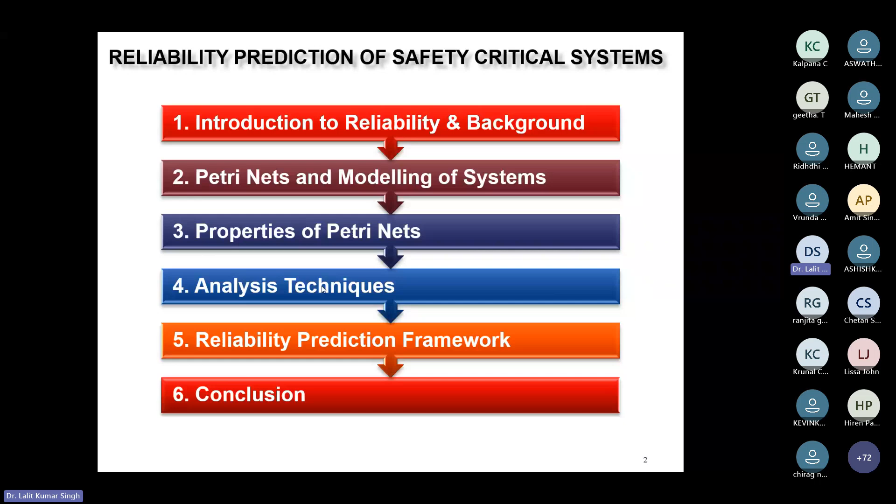Now let us see the mathematical definition. Suppose let X be the random variable representing the time to failure of a component—this much time that my component is going to take to fail. Then the reliability of the component at time t is given by P, which is a probability. Because I'm talking about reliability, it means X, which represents the time to failure, will always be greater than the target time. It should not fail before the target time. Then I can say this is reliable. So this equation is very clear.

From the total probability law, we can equate it as equal to 1 minus P(x is less than or equal to t), meaning it has failed before the target time. So it is nothing but a failure probability, which we can write as equal to 1 minus failure probability, denoted as F(x,t).

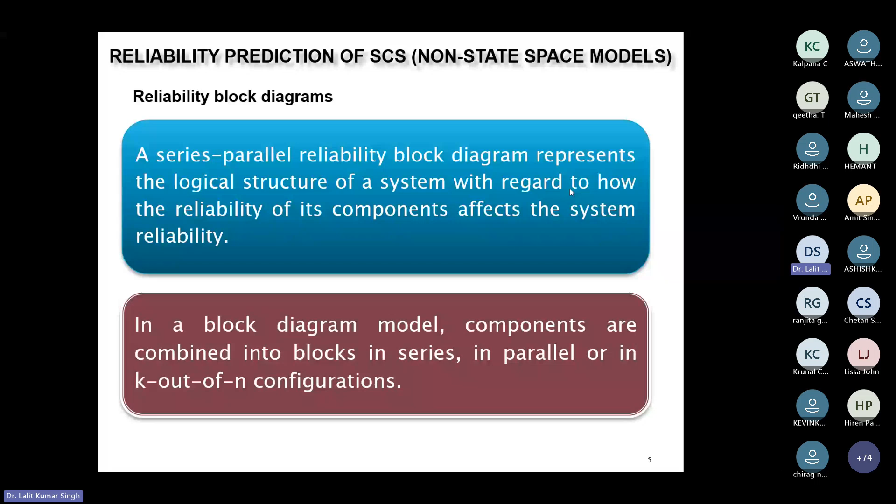Now let us discuss some traditional methods through which we can quantify reliability. The first is the reliability block diagram. In this, any system is decomposed into subsystems or components, and we find out how those components are arranged, whether in series or in parallel. If I know the component reliability, I can find the overall system reliability using series or parallel reliability formulas. For example, if a system contains only two components with reliability R1 and R2 arranged in series, the overall system reliability will be R1 into R2. If arranged in parallel, I can use the parallel reliability formula.

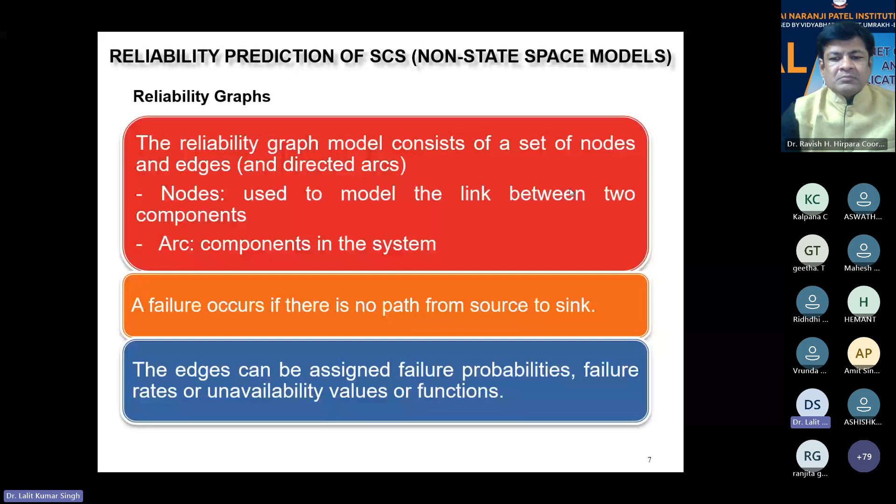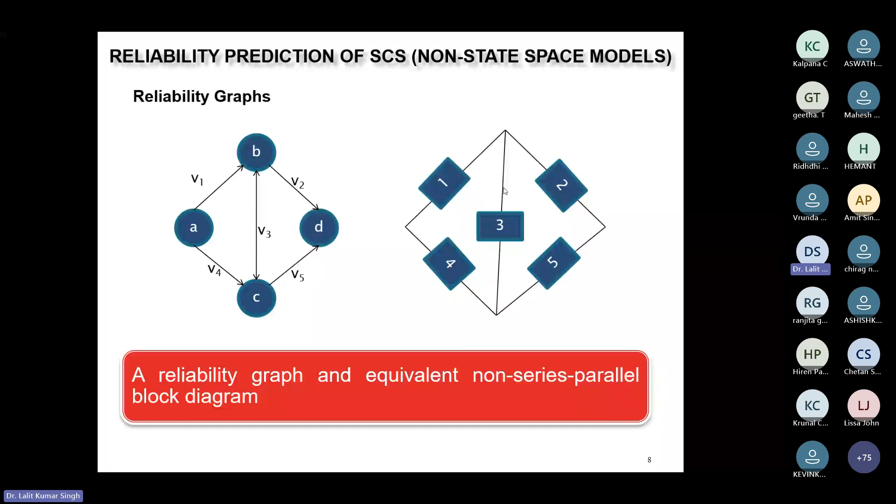There is one more very prominent method for reliability prediction or estimation, known as fault tree. Fault tree is basically a deductive approach. We know a tree has a root and branches, so it is like root and branches. The top level component is known as the root. In this approach, we try to deduce the cause of the failure.

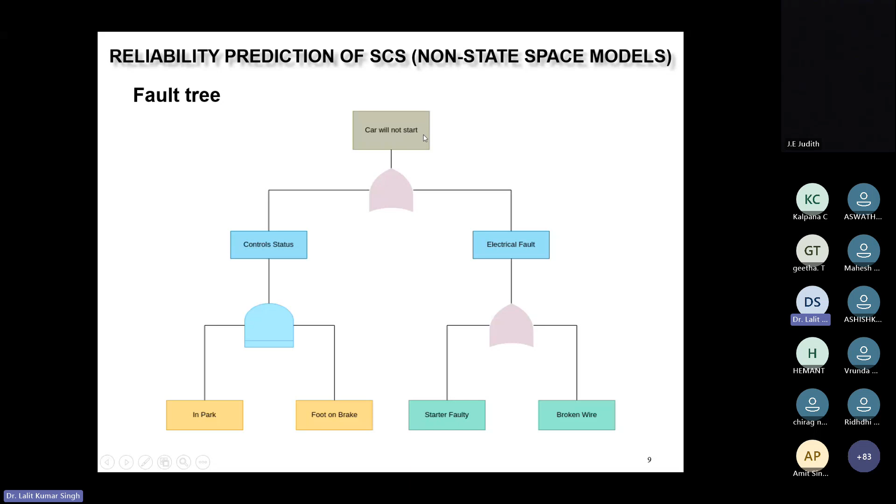And similarly, if they are arranged in OR logic, then it is P1 plus P2. In that way, we can keep on propagating towards the root, which will find out the probability of failure of the car not starting. And to know the reliability, I have to subtract it from 1 because it is a probability. We have already seen 1 minus probability of failure is reliability.

So now the models that we have looked at so far are non-state space models or deterministic models, in which it is very much essential that you should have some prior information about the failure rate or failure probability of the components. But the systems are always dynamic in nature, which keeps on changing their states with time.

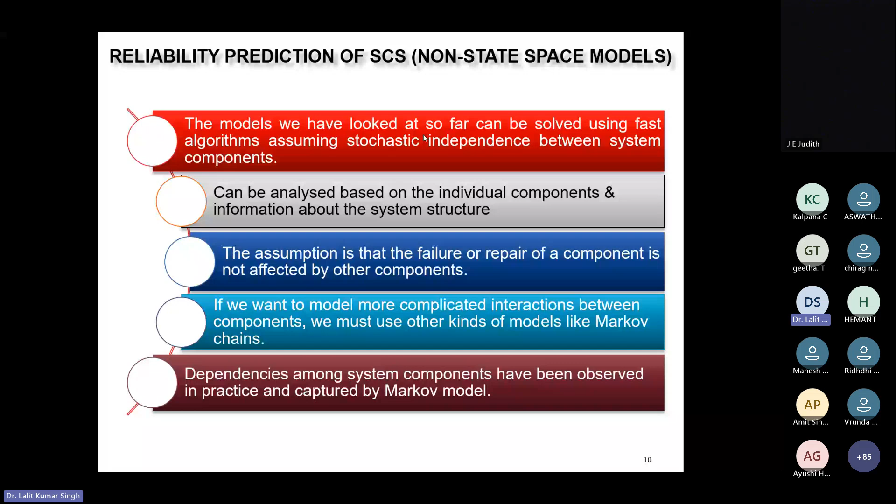So to capture the dynamics, there are many other models. For example, there is a Markov model, which is a very powerful model, introduced by Andrew Markov in the early 1900s, who was a Russian mathematician. He introduced this Markov model keeping in view that any system can be decomposed into various states, and a system can transit from one state to another state.

For example, if there is a human being, it is a system. There could be multiple states of the human, like walking, talking, eating, running, sitting. So some states could be the normal state and some states could be the failure state. For example, meeting an accident is a failure state. So generally the normal states are known as behavioral states.

So if somehow I'm able to find out the probability of the system being in all these states, I can add all the probabilities of the success states and that will give me the reliability. The other way out is I can add all the failure state probabilities, and then subtract by one. That will give my reliability.

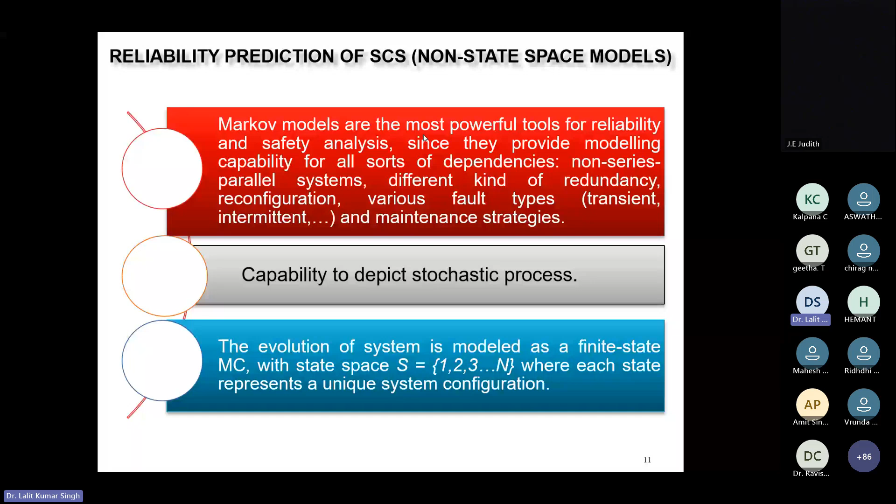Let us now understand some of the preliminary mathematics which we will be using to quantify the reliability. Suppose there are two states in my Markov chain, containing many states, and suppose there are two states i and j, which belong to S. S is the total state space of the system.

And let Qij be the transition rate from state i to j. Transition rate means number of transitions per unit time. And then I can calculate the self transition rate, that is Qii, meaning it is transiting from state i to state i.

It will be equal to minus — you have to sum all the transition rates except the self transition rate. So, minus Q, summation over all i,j's, where j will not be equal to i.

Then I need to define one terminology, that is the generator matrix, denoted by Q. It is nothing but a matrix; it contains rows and columns, and each element basically represents the transition rate of different states, from one state to another state. We'll see more insight about the transition rate when we discuss the real case study.

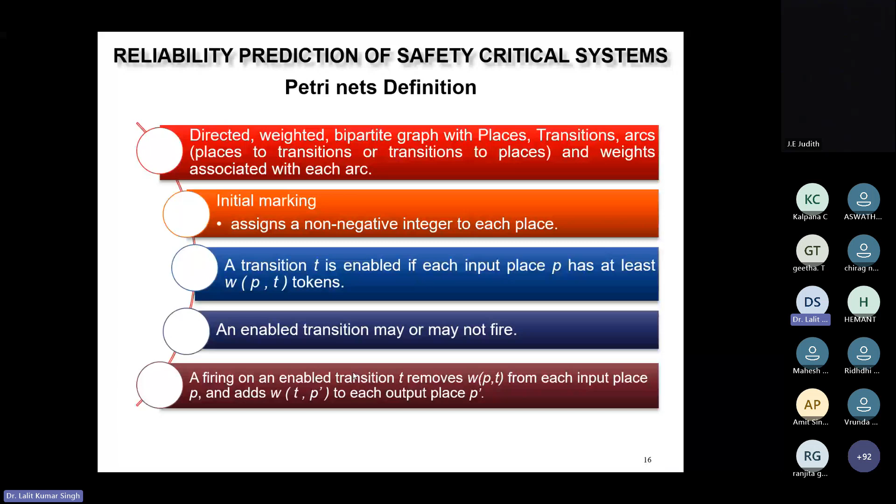Now, if you look into the working mechanism of PetriNets, let us take an example. I want to model a very small chemical reaction: 2H2 plus O2, which gives two molecules of water. Let us see how we can model this chemical reaction using a PetriNet.

If you are able to see this figure, it is a PetriNet figure. First let me make you understand the basic building blocks of this PetriNet, then we will see the working mechanism. If we look at the big circles, there are three big circles in this PetriNet. I'm using one to represent hydrogen, the second to represent oxygen, and the third to represent water.

After that, you would see a rectangular box known as a transition. Any place can be connected to a transition or vice versa, but there can be no direct connection between places, or between transitions. They are connected with the help of a directed arc, a weighted and directed arc — weighted because it contains a weight. If you look, the arc from the hydrogen place to transition T contains the weight 2.

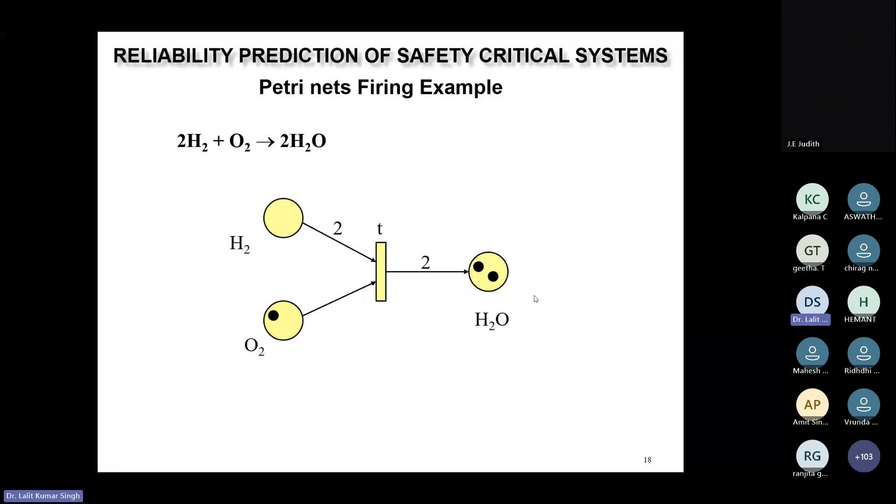The node will represent the state and the arc will represent the transition, because one state can transit to another state, and it will identify how many total states are possible at all. Okay, so anyway, that was the concept or the working principle of the Petri net.

Now coming to the Markov chain, I have already discussed a little bit about the Markov chain because, as I said, this concept was introduced by Andrey Markov to represent the state space of the system. I mean, it contains the states and the transitions. So basically, the crux is you can decompose any system into the various states and how it is transiting from

one state to another. And one more property of the Markov chain is the next state will only depend on the current state and not on the previous states. That is but obvious. It is based on practical life. So how mathematically can we represent this property? Suppose there is a sequence of random variables, x1, x2, and so on.

Then what the Markov property says is, the probability that my system is in state n plus 1 is x will only depend on the probability that my system was in the nth state and not on the previous states. So hence all the previous states have been discarded, and it is only depending on the current state. Next state will only depend on the current state. And

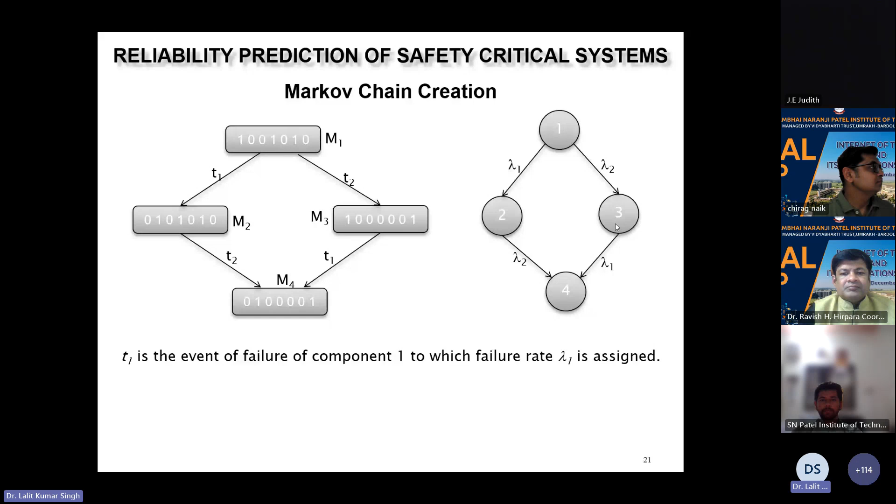Okay. So just to show how it can be represented, because we are going to use it in our framework. Okay, now I have discussed some of the fundamental concepts which are required to understand all the reliability prediction framework activities, and now let me explain the reliability prediction framework. So generally, it contains three phases.

And in the first phase, you have to create the Petri net model. And we have already seen how we can create the Petri net model. It contains the places, arcs and transitions, and places and transitions are connected by weighted and directed arcs. So first we have to understand the system specification and create a Petri net model.

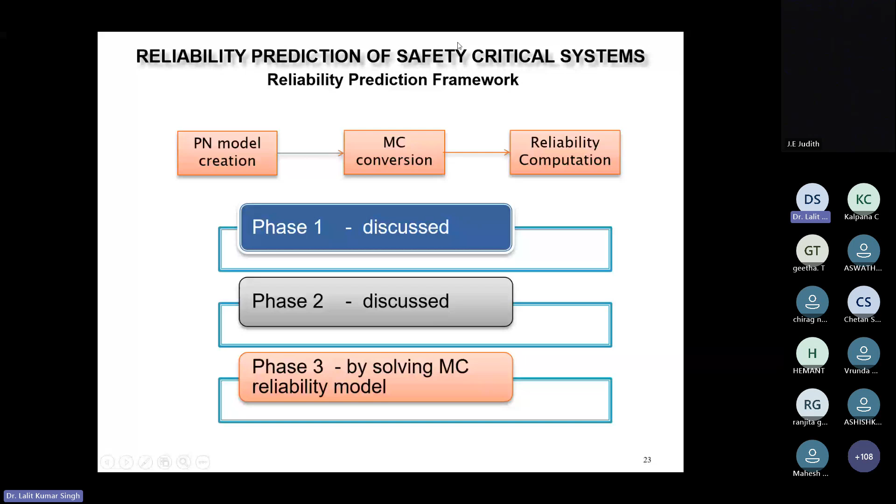So before coming to the real case study, let me make you aware of one more important mathematical concept. Suppose there is a pi i(t) which represents the probability that a system is in state i at time t, where i represents all the failure states or behavioral states. So i could be any state, either failure or behavior. Assuming there are M failure states and N behavioral states, I have written it like that. So as t goes to infinity, all these probabilities converge to a stationary distribution.

Now this is a very important concept, which says that any system can be settled down within an infinite period of time. So for example, let me explain with the help of a very small example. Suppose you have a glass and you fill it with water and put it down. You will see that initially your water will be in a very zigzag mode, and after some time it is settled,

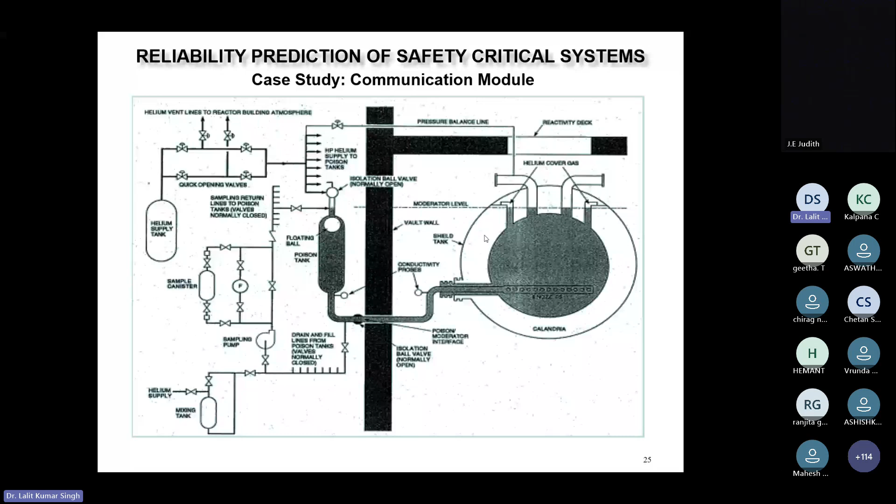Okay, now let us try to understand the communication module. Just leave this, it's not much related. But suppose there is a network. Let me explain this network. You have the embedded unit, which is capturing the data from the field sensors. Field sensors may be telling what the tank level is, or the status of a valve, whether it is open or closed, what the pressure of a particular pipe is, and so on.

These signals are transferred in terms of voltage, which gets converted into engineering units, and now this data needs to be transferred to the display unit, because there is an operator who wants to see that data in visual formats, for example tabular trend, tabular format, graphical format, bar graph, whatever. So the embedded unit needs to transfer the data to this display unit, and it is transferring the data over the LAN, that is a local area network.

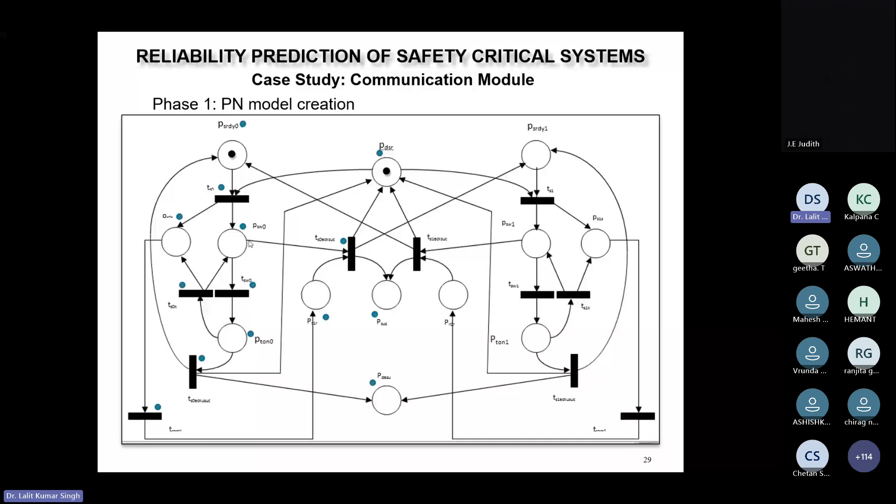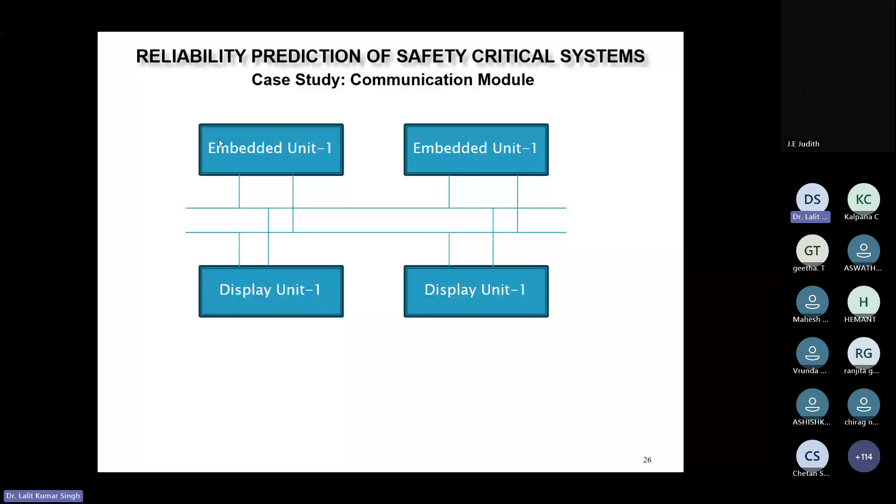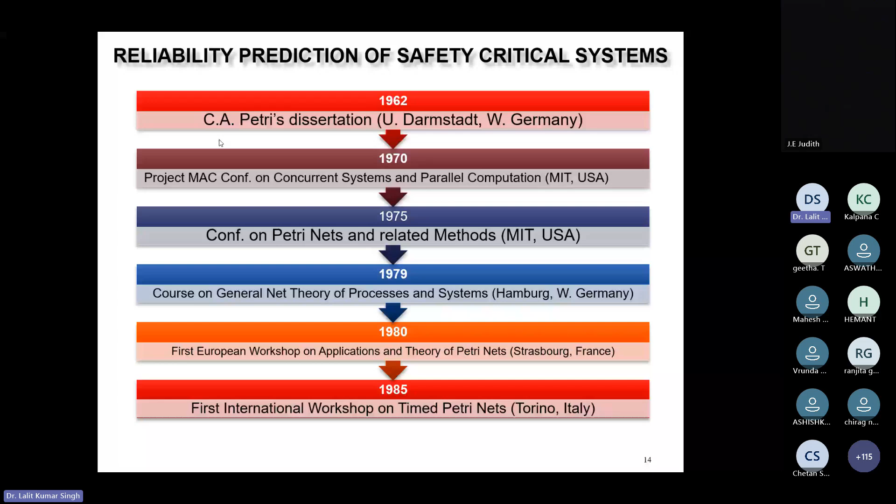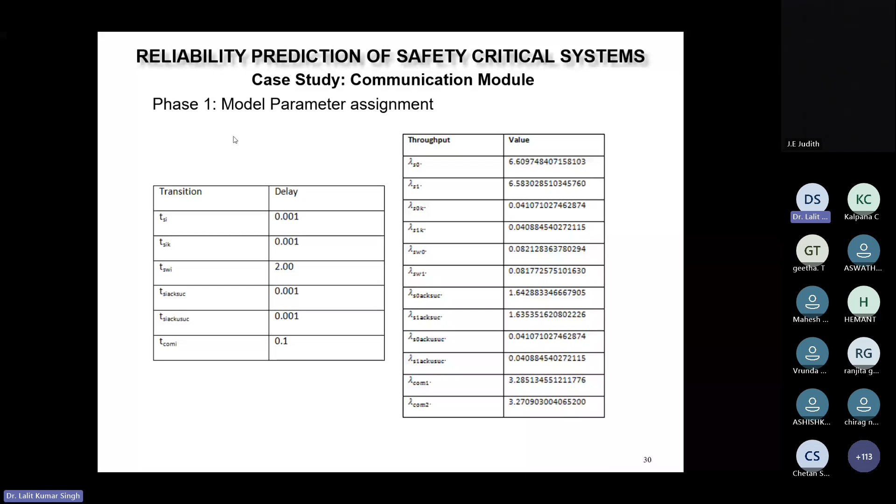Okay. And you all already know all these values of the throughput, which we have already computed here in this slide. So you have to just put those values and solve, and this will give the generator matrix, that is the transition rate matrix.

And now you have to compute the transition probability, like what is the probability of transiting from one state to another state. So the funda is very simple. Suppose you want to transit from state I to J, and you want to quantify the transition probability from state I to J. It will be the transition rate from I to J, and you have to normalize this transition rate. So for normalization, you have to sum all the transition rates except the self transition. And this is done when J is not equal to I, otherwise it will be 0. So this will be the transition probability matrix.

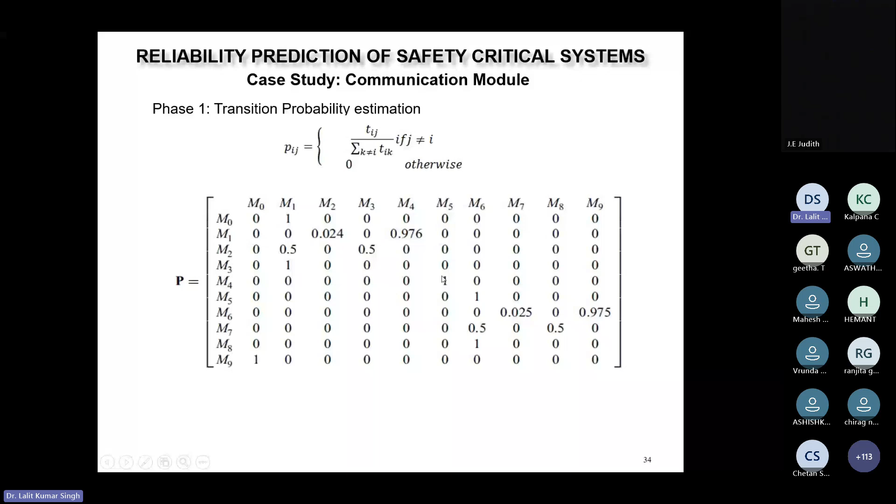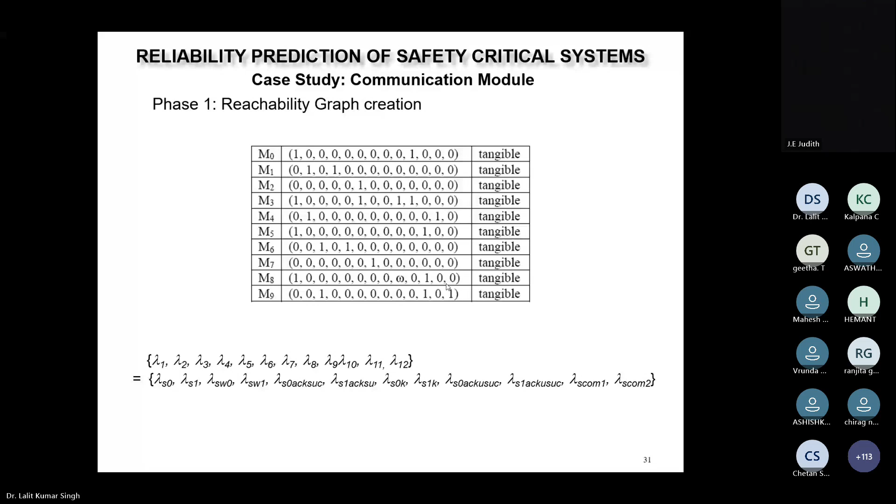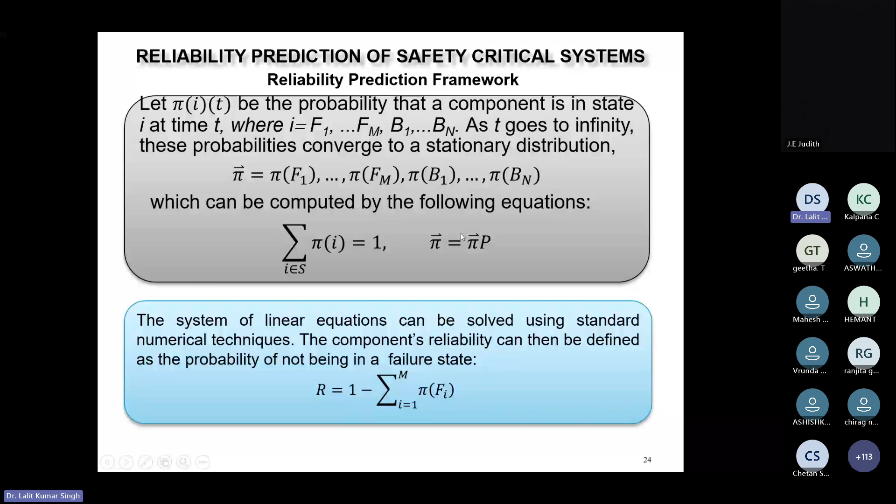Okay. And now, beautifully, we can use those two equations. Let me go back to those two equations. Yeah. So the sum of all the state probabilities will be equal to 1. That is M0 plus M1 up to M9. And this is what we have written here. So this is the steady state.

Suppose M0 to M9, and this will be equal to this, and you have to multiply it by the transition probability matrix. So by solving this, with M0 plus M1 plus up to M9 equal to 1, and solving this equation through methods like Monte Carlo methods and all, you can get all the values of M0 to M9, which is this, and these are basically the state probabilities.

Okay, and now if you go back, I have found out what is the probability of my system being in M0, being in M1, and so on. If you see, there are two failure states. One is M3 and M8, because the acknowledgement has not been sent successfully. The acknowledgement was unsuccessful here and also here, leading to M8.

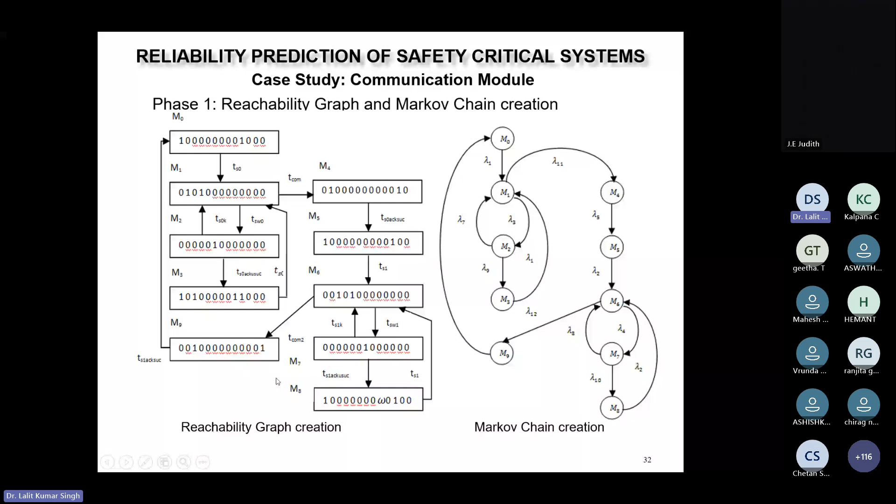And so what you can do is just add these two, M3 plus M8 state probabilities, which are the failure state probabilities, and subtract it from 1. Or otherwise, you have to add all the state probabilities leaving out M3 and M8. Then it will give the reliability of the system. Okay. So what we have done, we have just added M3 and M8 and subtracted from 1, which has given the reliability of 0.99603, which is a very good reliability figure.

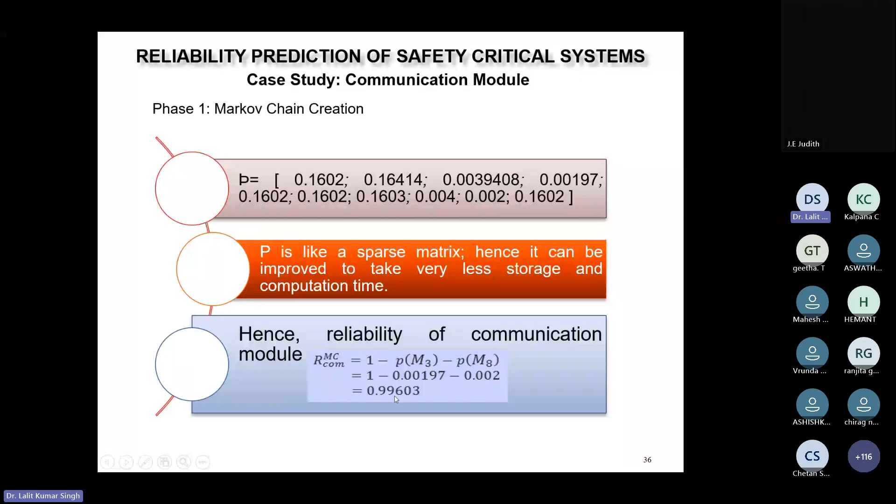That was the crux. The crux is we have seen how we have quantified the reliability of the system, and we have seen our reliability prediction framework, which contains basically 3 phases. In the first phase, after understanding the specification or the requirements, we model the system using the Petri net. We have already seen the working mechanism of the Petri net, and after that we have to create the reachability graph, and then we have to utilize the mathematical knowledge, and using that we can easily quantify the reliability of the communication protocol.

So not only the communication protocol, you can even quantify the system reliability by breaking it into smaller chunks, find out the reliability of different subcomponents, and see how those subcomponents are arranged, whether in series or in parallel and all. And you can then apply the series and parallel reliability formulas or a reliability block diagram, so that you can quantify the reliability of the overall system. So that was the crux of my session.